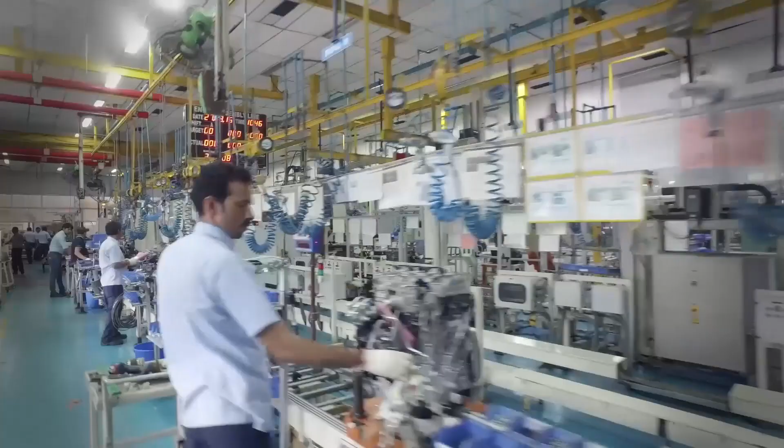The 21st century has seen the manufacturing world scaling unprecedented heights. With path-breaking innovations, cutting-edge technologies and flawless products, everything that you can possibly imagine is now happening every day. There is one company in particular that has not only seen this change through, but has also played a very active and vital role to create products that exceed all customer expectations. Welcome to the journey of AVTEC.

A force to reckon with, AVTEC is a part of the globally respected and diversified Indian conglomerate, CK Birla Group, that operates in 3 industry clusters.

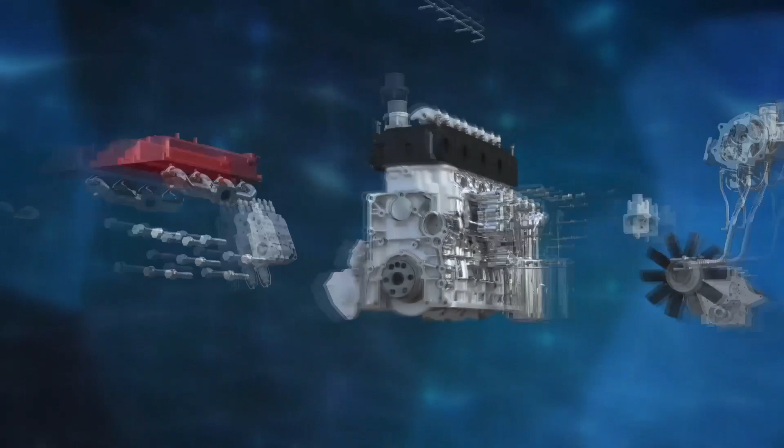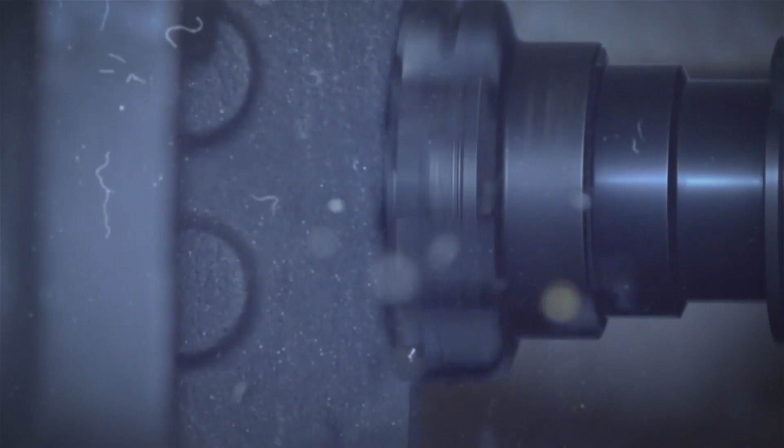As India's largest independent manufacturer of powertrain and precision engineered products, AVTEC has always believed in its guiding principles of practice, customize and innovate, because at AVTEC, doing things perfectly is the only way to get things done. With innovation at its helm and precision in its vision, AVTEC has come a long way since its inception.

We put our best foot forward in both domestic and international markets to deliver competency across the entire value chain. When it comes to design and manufacturing of powertrain aggregates or high-precision components for automotive, off-highway, agriculture, railway and defense applications, AVTEC is at the top of its game.

AVTEC's manufacturing units are strategically located at Pithampur, Hosur and Chennai in India, and a top-of-the-line design, prototype and batch production facility, ASAGE in Switzerland, cater to its Indian and global client base.

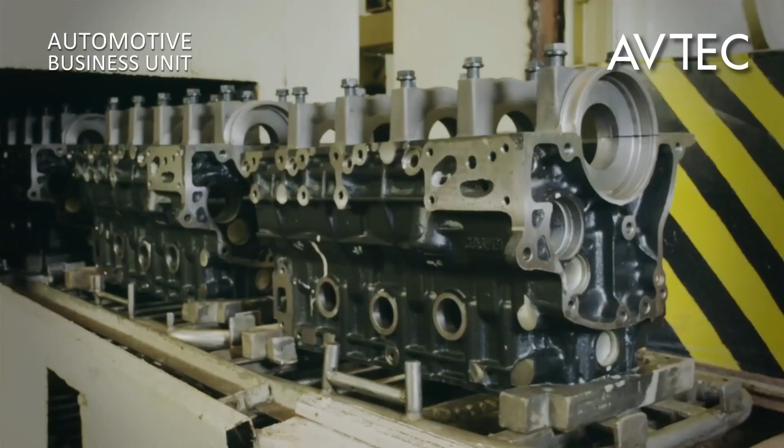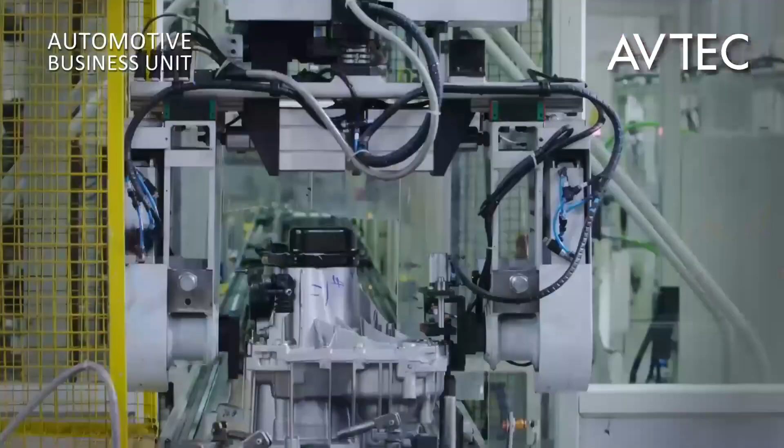These modern plants are busy round the clock in the production of proprietary products and contract manufacturing of powertrain aggregates like petrol and diesel engines and transmissions for some of the highly renowned global OEMs, covering a wide range of product categories like passenger cars, SUVs, and light and medium commercial vehicles.

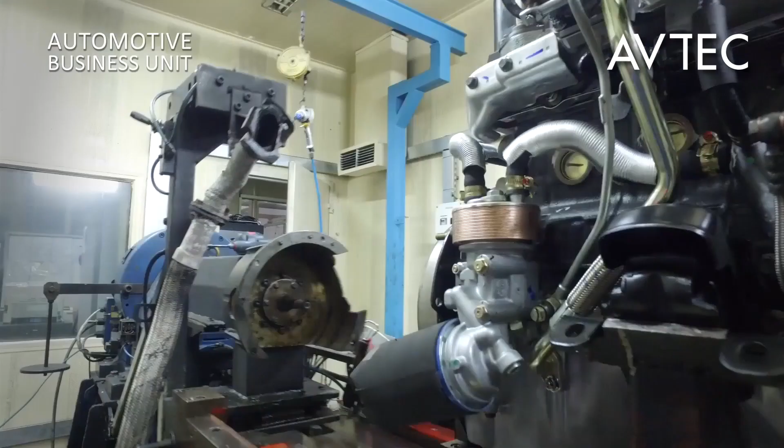These plants are equipped with automatic assembly lines, adhering to stringent quality control measures at each stage of assembly. End-of-line testing and validation ensures highest quality products and highly efficient turnaround.

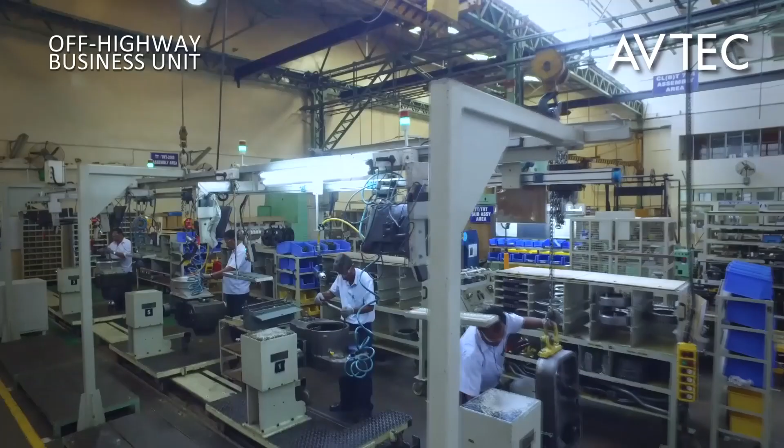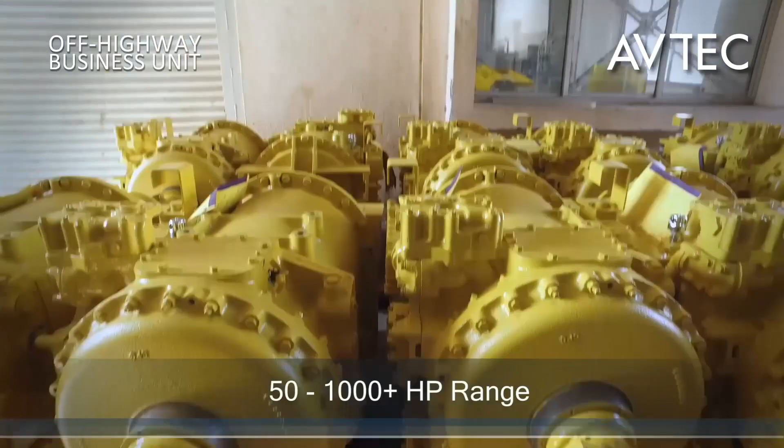AVTEC is the only Indian player with the extensive capability to design and manufacture automatic and power shift, heavy-duty cycling and hauling transmission aggregates in the 50 HP to 1000 plus HP range.

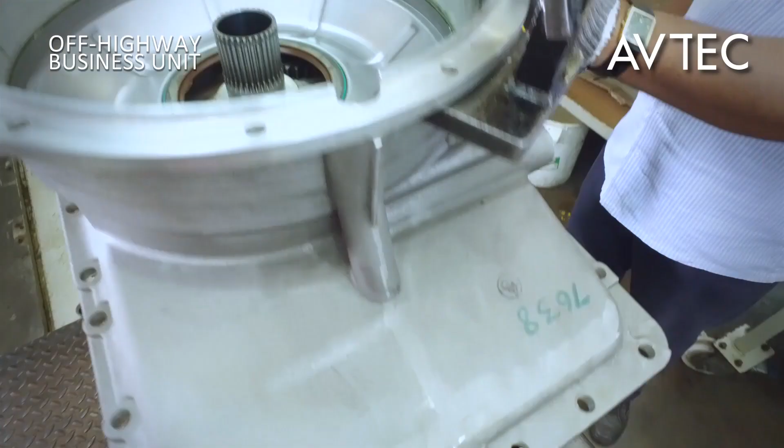Our existing customers in this segment consist of some of the leading domestic and global off-highway OEMs, covering a wide range of applications including loaders, dump trucks, forklifts, railway OHE cars, cranes and select defense applications. All our plants follow a cellular manufacturing approach which supports a broad product mix and a faster response.

With years of expertise in powertrain aggregates, AVTEC is now setting benchmarks in the manufacturing of high-precision engines and transmission components. We offer complete build-to-print solution for a wide array of critical components, specializing in gears and shafts and large housings.

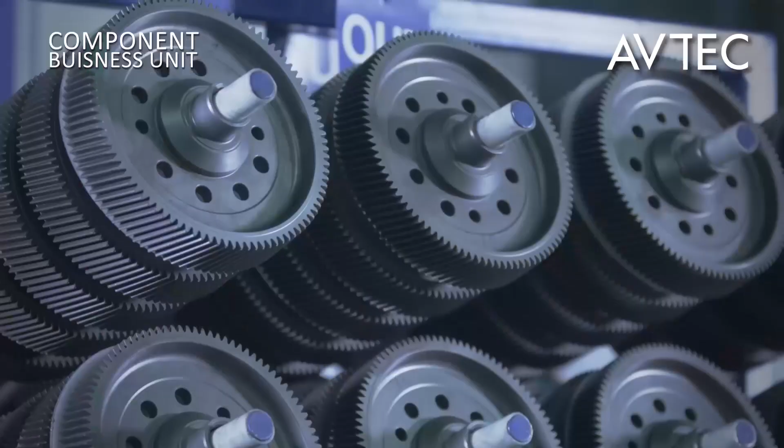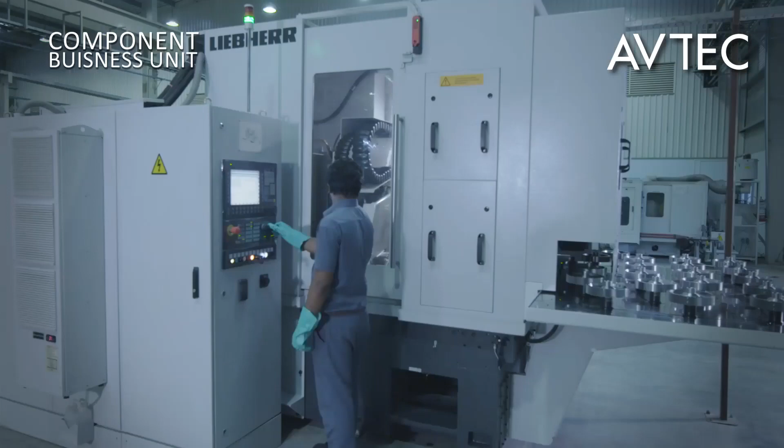AVTEC's manufacturing plants are equipped with world-class machines like Liebherr, Gleason, Hyundai, Mori Seiki, Höfler and Reishauer gear grinding, with the provision of tracking system and traceability mechanism, empowering it to deliver the best-in-class quality and cost performance for volume production requirements.

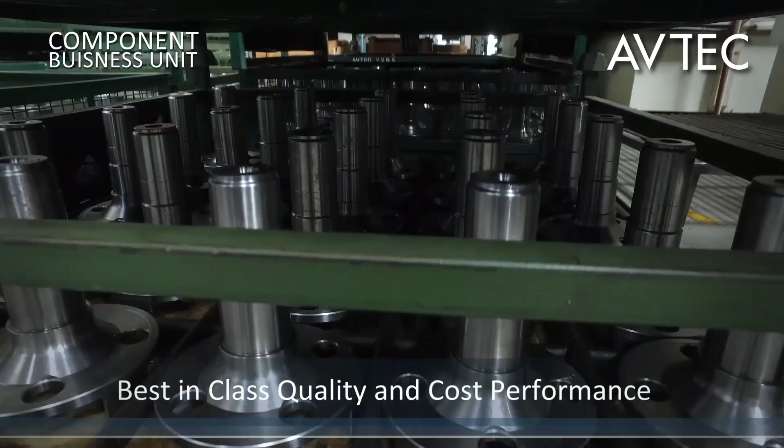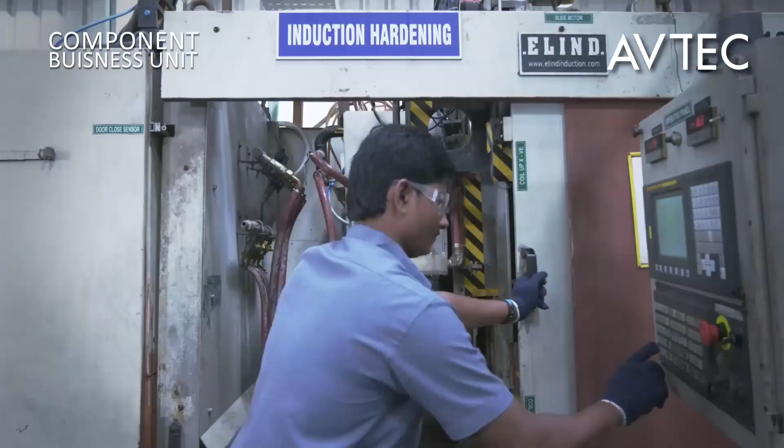AVTEC handles all the critical processes in-house like shaping, rolling, shaving and hobbing, heat treatment processes like nitriding and induction hardening, providing complete control of the manufacturing process, resulting in highest quality of production.

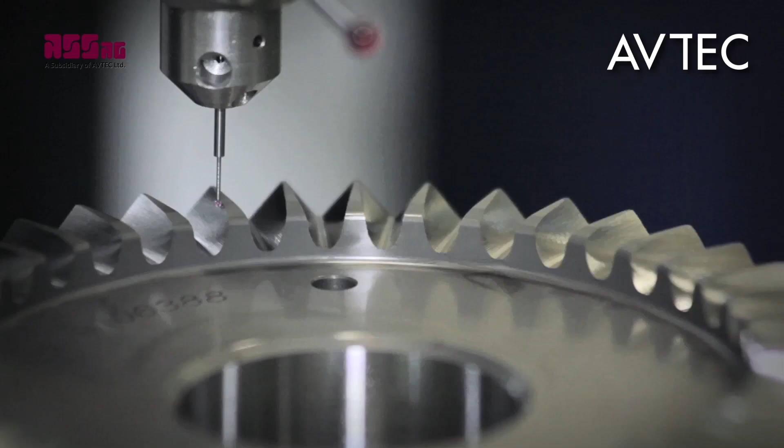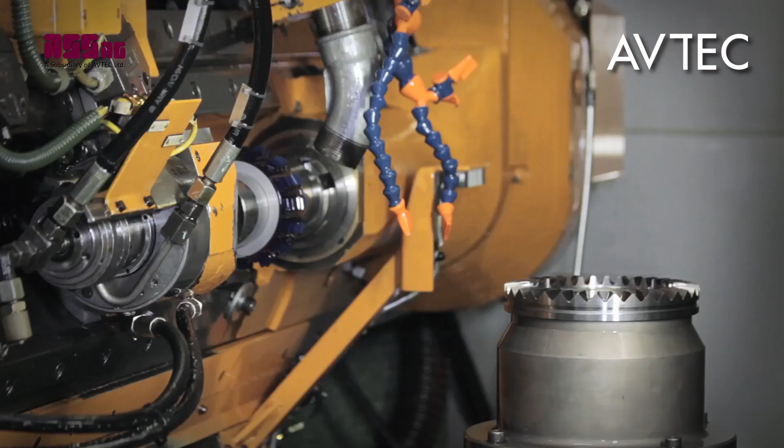ASS AG Switzerland, a 100% subsidiary of AVTEC, is the world market leader in crown gear technology and a leading enterprise for drive systems, offering face gear technology with innovative gear solutions, including precision wave drive systems for automotive, industrial, medtech, machine tools and robotics, with a focus on niche and specialist applications.

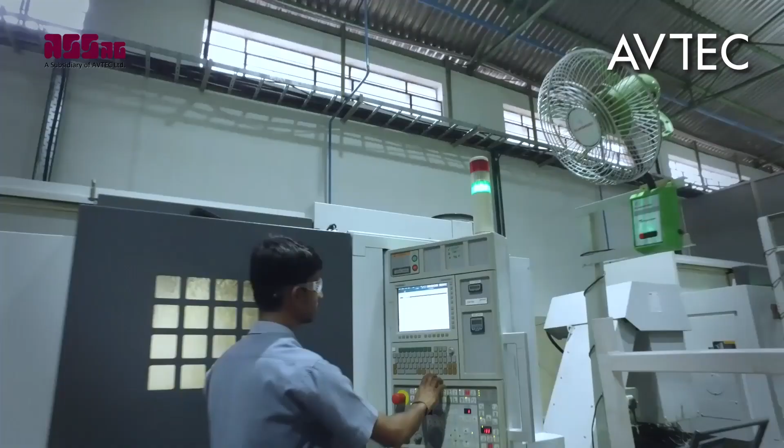AVTEC has also started producing components with the face gear technology at its plant in Hosur, India, enabling it to provide an extremely viable solution for its European customers. This has enabled AVTEC to make inroads into the burgeoning European markets and serve its customers as a one-stop solution for their complete powertrain requirements.

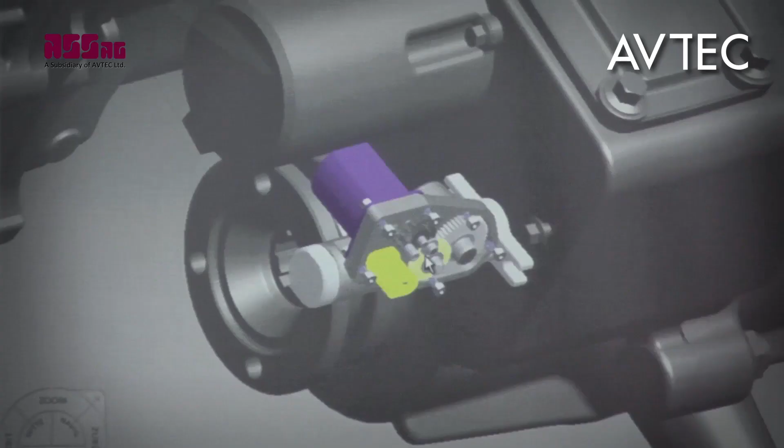AVTEC was founded on the principles of consistent innovation and upgradation of technology, continuing its search for perfection. AVTEC has built a tech center at Hosur for designing new and better products for diverse applications.

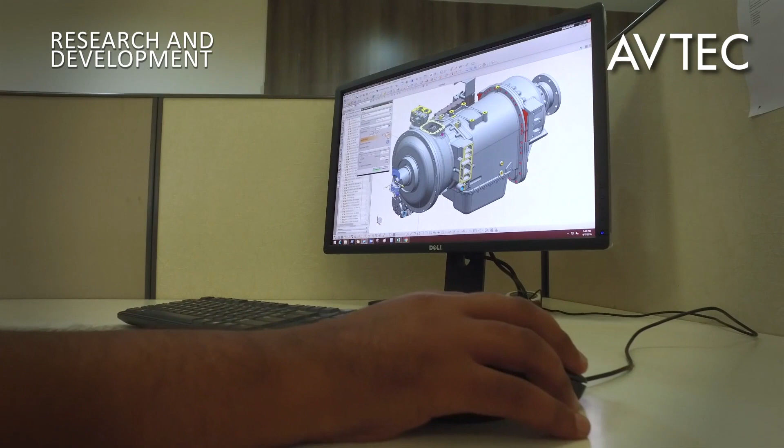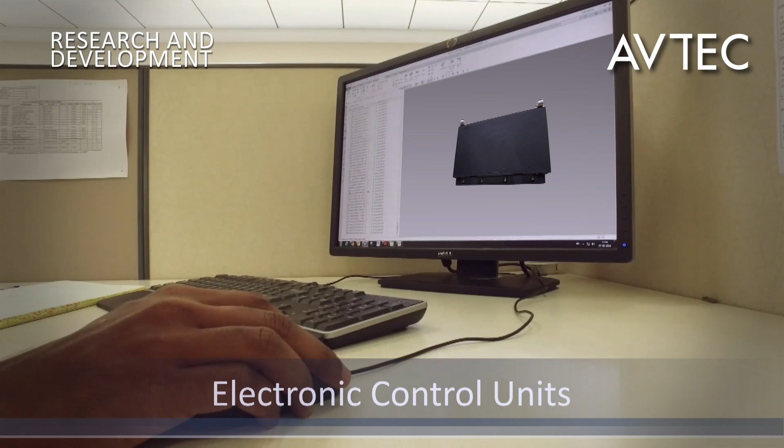Our research and development facilities are ever engaged in product designing and simulation with the latest software like UG, ProE, KISSsoft, AVL Boost and Nastran, with in-house testing facilities including emission test beds. The Tech Center has also developed some specialized products such as electronic control units and gearboxes for metro rail and defense applications.

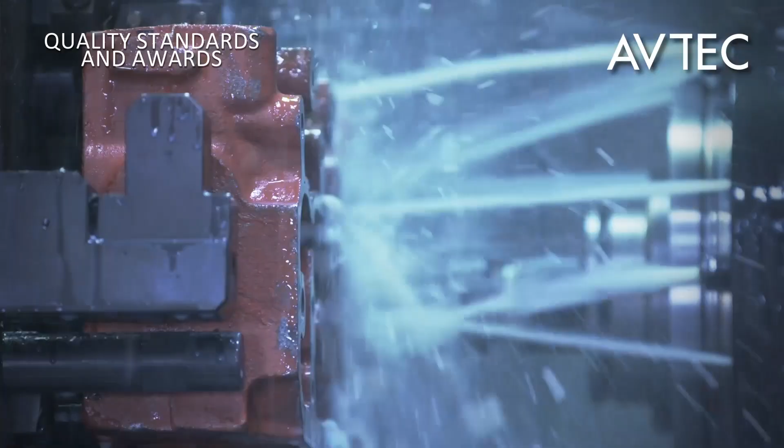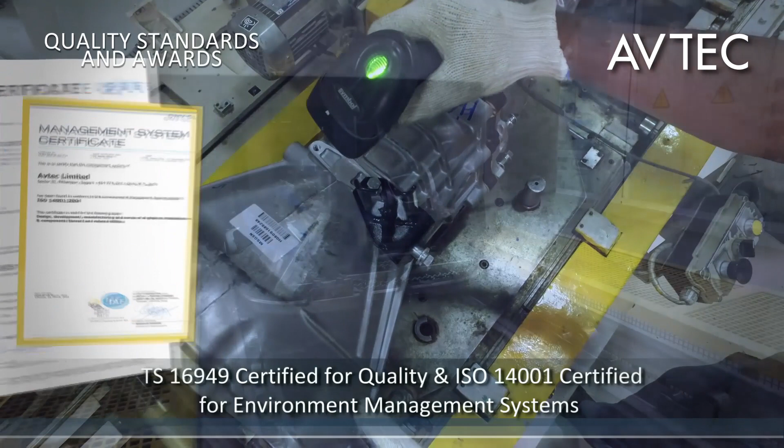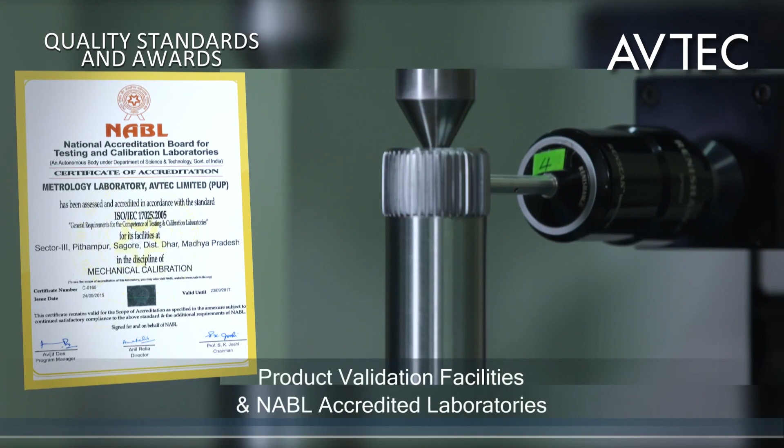To ensure quality control at every step, AVTEC has developed process-driven quality controls at each stage of its manufacturing processes and assemblies. All its manufacturing facilities are TS 16949 certified for quality and ISO 14001 certified for environment management systems. AVTEC also boasts of product validation facilities and NABL accredited laboratories that helps in calibration and ensuring highest quality products for its customers.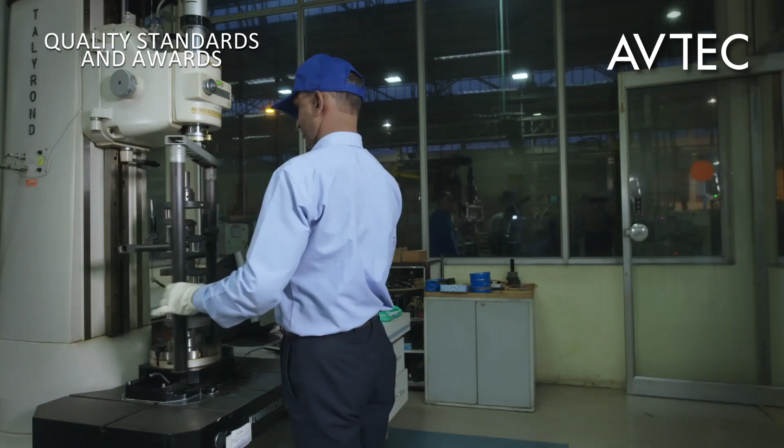Winning the trust of leading global and domestic OEMs is the testimony to AVTEC's commitment towards quality, cost optimization and delivery, ensuring complete customer satisfaction. For its high-performing product lineage and successful track record, AVTEC has been bestowed with many awards. The company has also received the TPM Excellence Award from JIPM Japan for all its manufacturing facilities.

All this recognition stems from the fact that AVTEC has a great team in place, which it believes in nurturing through various workshops and personnel development programs.

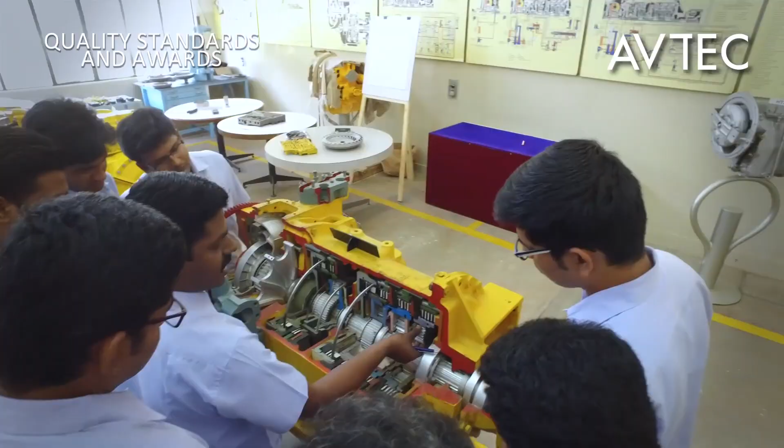At AVTEC, what inspires and gives us strength is serving our customers through innovative products and services, so we can make their experiences better. We value our customers the most and leave no stone unturned to brighten their lives with the promise of satisfaction. Their trust in our abilities inspires us to perform with utmost perfection and precision. Our customers are the core of our business and we deliver what we always promise.

Precision, perfection and performance every single time.